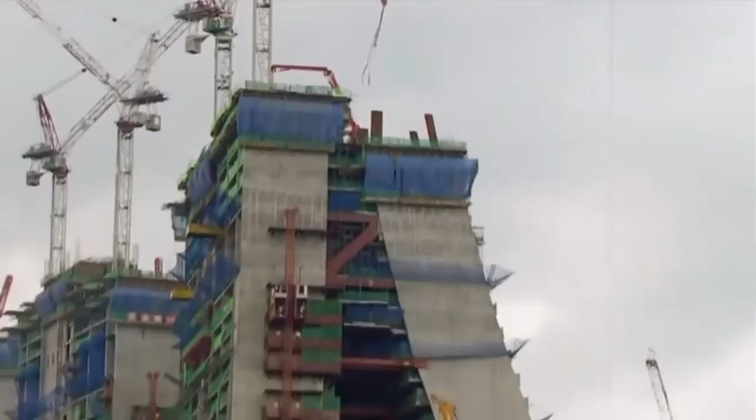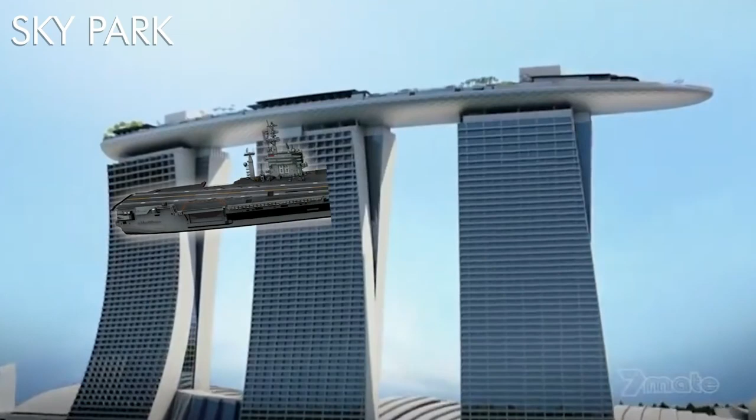During the construction of Marina Bay Sands in Singapore, engineers had to face a challenge they had never imagined. According to the building design, a sky park was going to be built on top of 3 towers, whose size was supposed to be larger than the US Navy's Nimitz aircraft carrier.

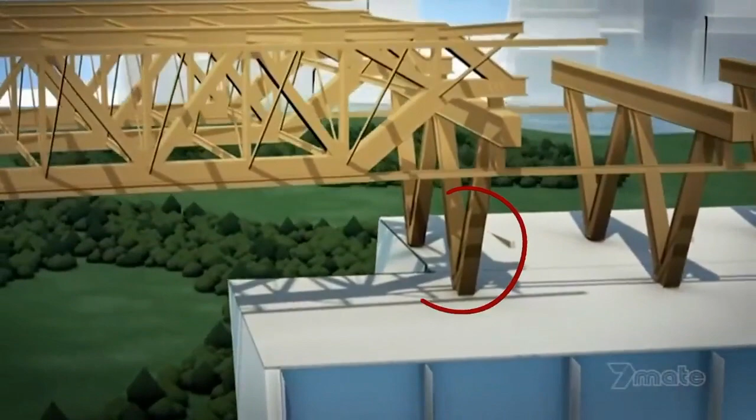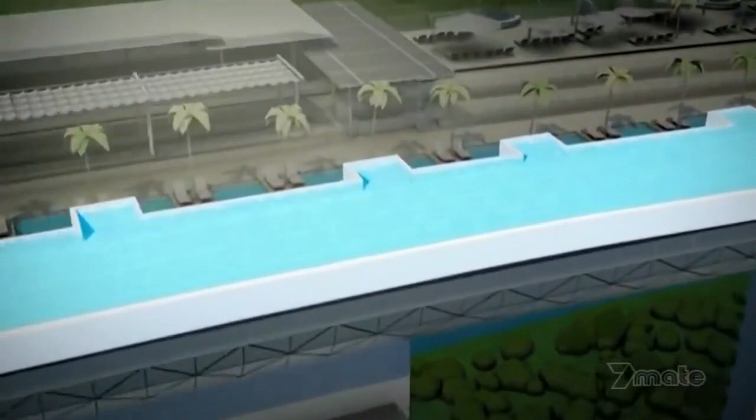And when it was time for the construction of the sky park, engineers found a major fault in the building design. The fault was that the 3 buildings might swing up to 200 millimeters during a tornado, and if the sky park was built despite this fault, the swimming pool filled with 1.5 million liters of water might crack, and the destruction that it would cause is unimaginable.

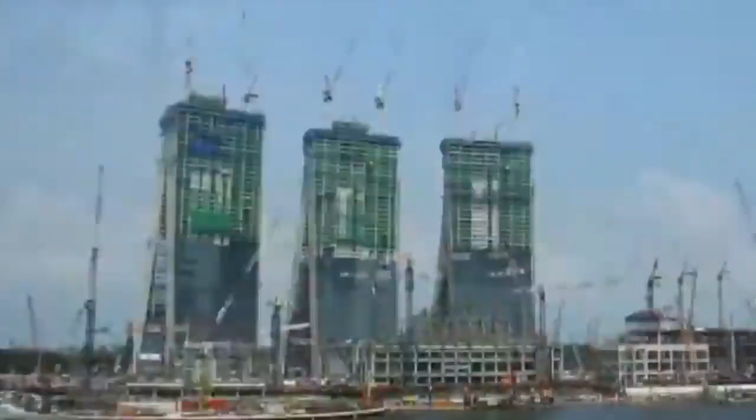Already years of hard work and millions of dollars were spent on this project, and on the other hand, dropping the idea of the sky park would be like compromising the beauty of the entire structure. They needed to find a solution which would keep the sky park safe despite the swinging of the building during strong winds. This was such a serious issue that the entire construction and architecture team was anxious, but a miracle happened.

Singapore is a country which has only one city, and that is Singapore. The entire country is so small that it is slightly larger than the Indian city of Mumbai.

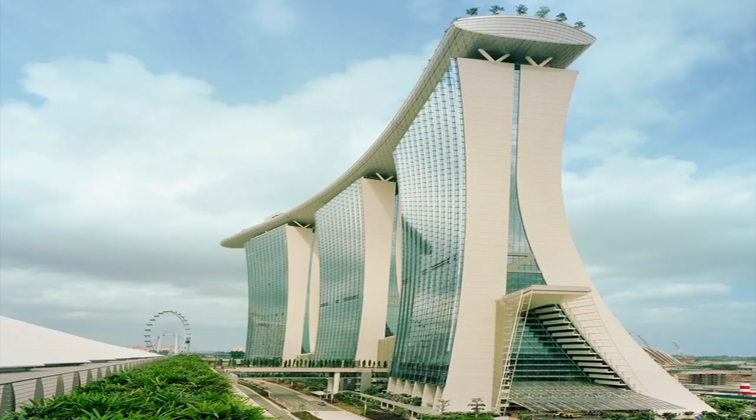Singapore's Marina Bay Sands is one of the most complicated construction projects in the entire world, and that's why it is called an engineering masterpiece. Engineers had to construct not 1 but 3 buildings, whose one portion was going to be bent, and that too taking support from the other portion.

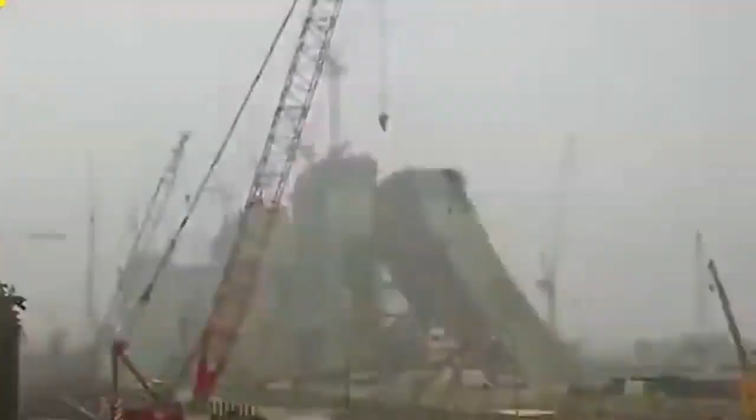The project, costing $8 billion, had 3 buildings 680 feet high, a sky park bigger than an aircraft carrier, a 200 feet high arts museum, and a floating entertainment pavilion that were going to be constructed, above the water. With the cost at which Marina Bay Sands was built, 5 Burj Khalifa-like buildings could have been made. The labor and hard work needed to make this masterpiece was an astounding 16,500 workers who worked together.

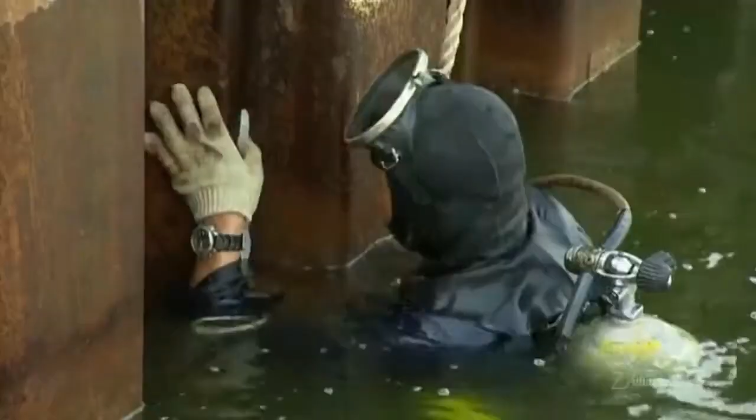Construction workers and engineers faced many challenges, from laying the foundation on soft wet soil near the seashore, to constructing a curved-shaped structure and a unique sky park over it. This was not only the first challenge of their life, but no construction project in the past had faced this kind of challenge. Let's come and see the challenges and their solutions.

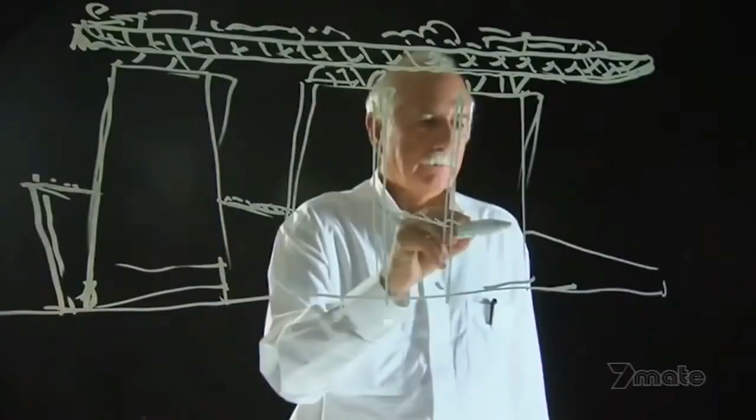Challenge number 1. It was American business tycoon and owner of Las Vegas Sands Corporation, Sheldon Adelson, who was behind the project, who has often been featured in Forbes' richest list. Adelson wanted to build a project that would become the identity of Singapore, and obviously for such a project, its design had to be very unique.

For this purpose, there was no better option than an architect like Moshe Safdie, whose curved designs are mind-boggling, but difficult to construct. After months of hard work, Safdie presented his design, but this design presented a big challenge for the construction team.

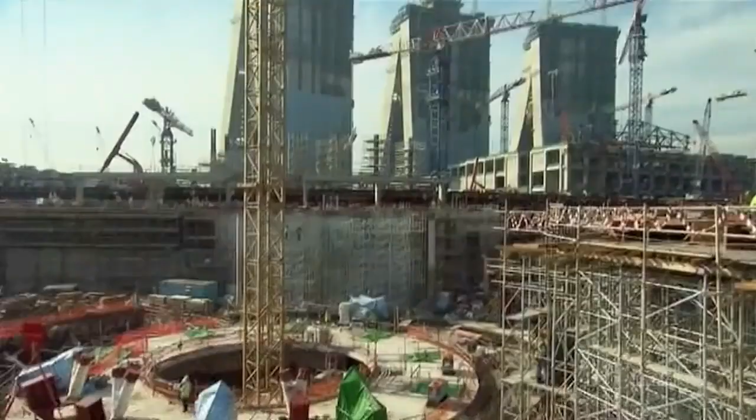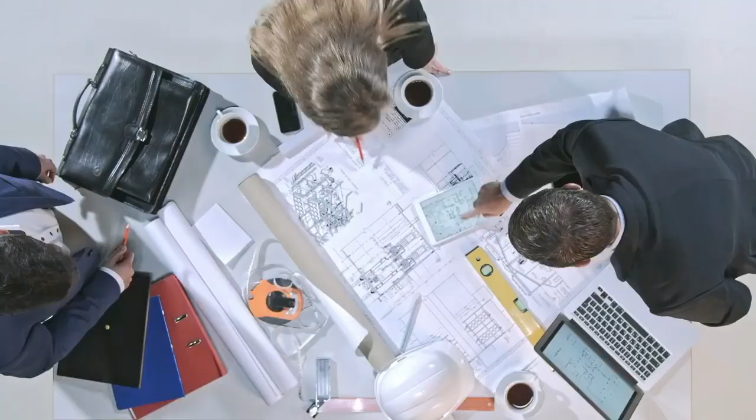According to the construction team, it would take at least 7 years to complete the project, but Sheldon Adelson wanted to complete it within 3 years. In these 3 years, the entire project with the 3 towers, its interior, museum, floating pavilion, and the most complex sky park needed to be built. Accepting the challenge was a big achievement for the construction team in itself.

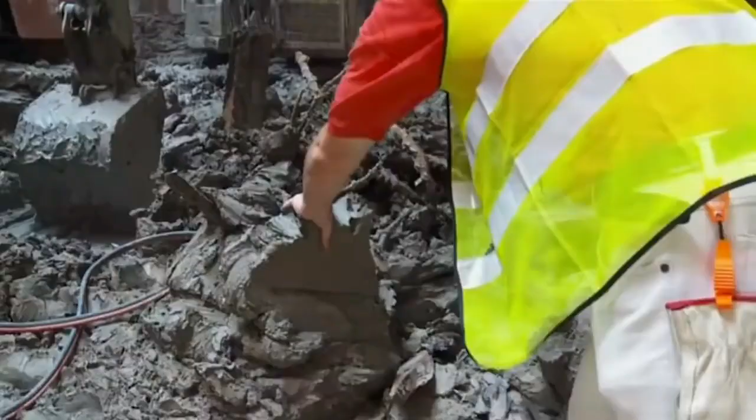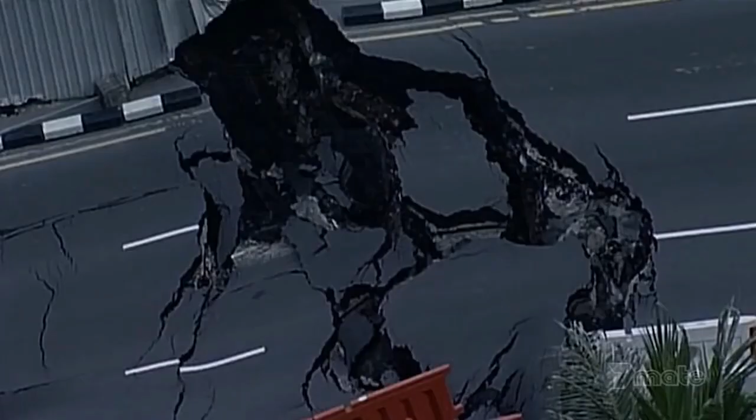Challenge number 2. The site chosen for the construction work was full of soft clay due to the proximity of the sea, which engineers call marine clay. The marine clay is very soft, and it's very hard to walk over it, let alone construct something, and if the marine clay is not treated correctly, it can prove disastrous, which was evident in Singapore's Nicoll Highway case.

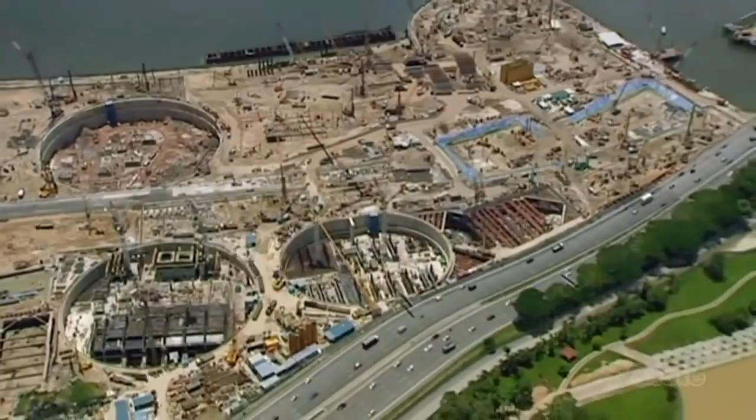A feature of marine clay is that if some of the clay is removed using an excavator, the clay surrounding the ditch fills it quickly. Therefore, it was necessary to find a solid solution so that the clay surrounding the ditch is not able to fill it. To address this issue, engineers decided to build a concrete wall of 1.5 meters thickness, also called a diaphragm wall.

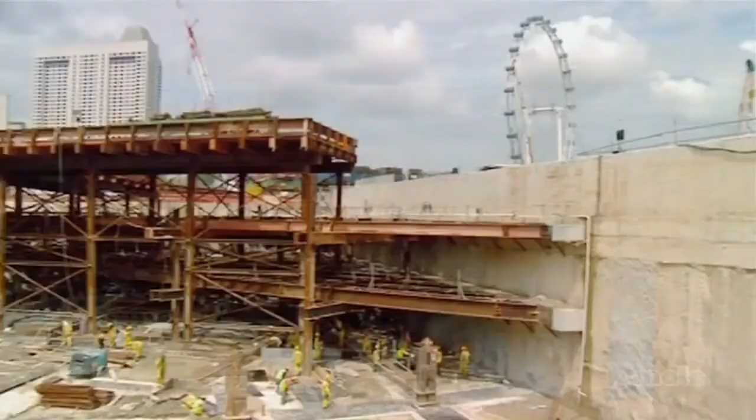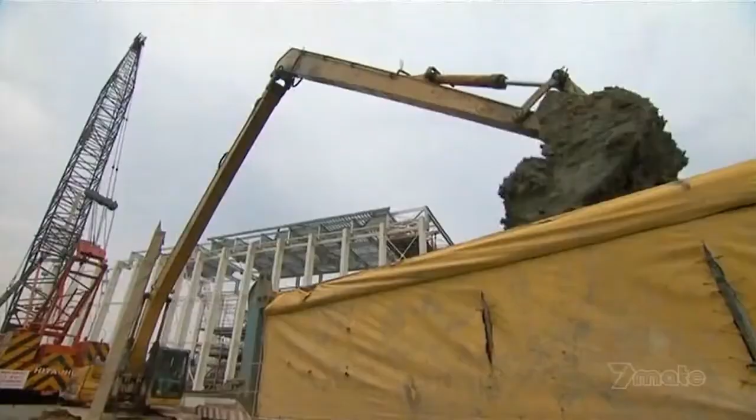A 4,000 meter diaphragm wall was constructed, with a depth of 50 meters below the ground, and with the help of excavators, the marine clay was removed inside them. It took engineers 1 year to remove the marine clay. Now they were left with 2 years to complete the project.

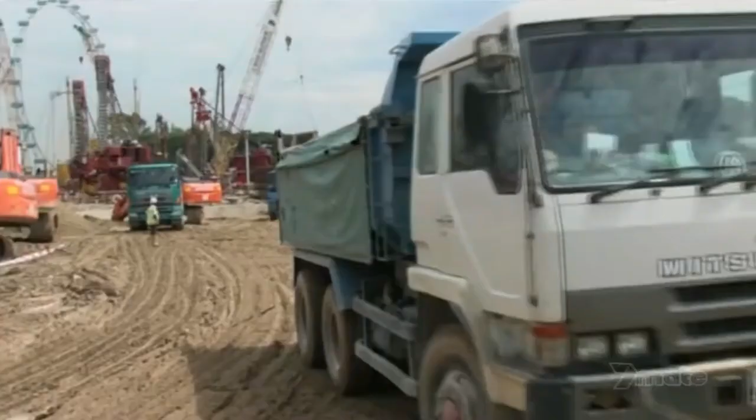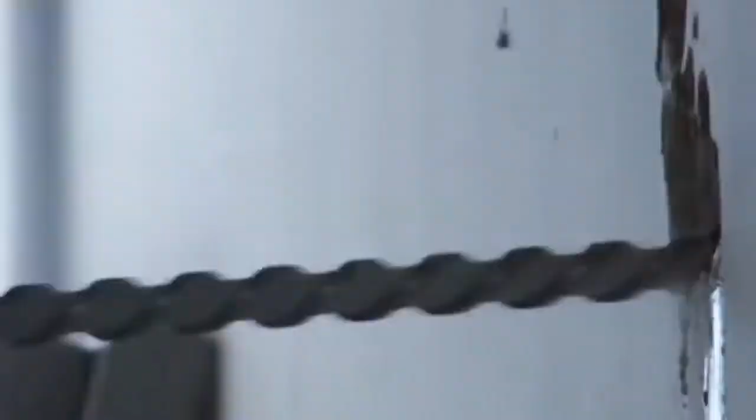Challenge number 3. After getting rid of the marine clay, engineers were left with only 2 years to complete the entire Marina Bay Sands, and this was really a very difficult task. The engineering team didn't budge down, and decided to construct every part of the project simultaneously. But for that, a large number of workers was required. A mind-boggling 16,500 workers were hired to work day and night, in shifts.

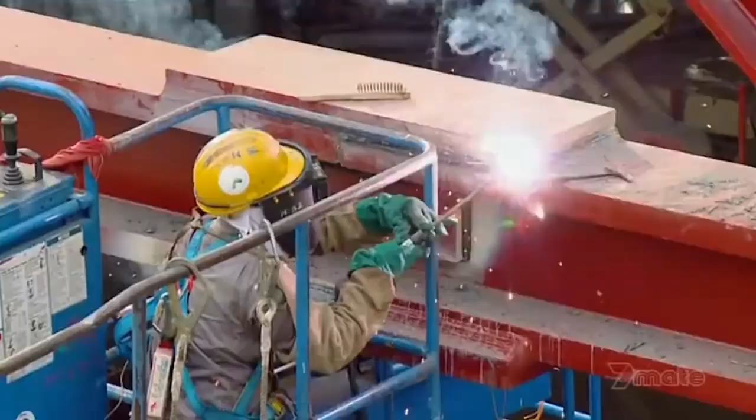It was a daunting task to manage this army of workers and provide them food. For this purpose, the world's biggest canteen was made. In this canteen, just for preparing one-time meal, $82,500 was spent. Challenge number 4: the complication for the construction of the 3 towers was that one portion was straight, and the other one was curved at a certain angle, and both parts would stand in support of each other.

On paper, it looks easy, but practically building this was a challenge that nobody had ever attempted before.

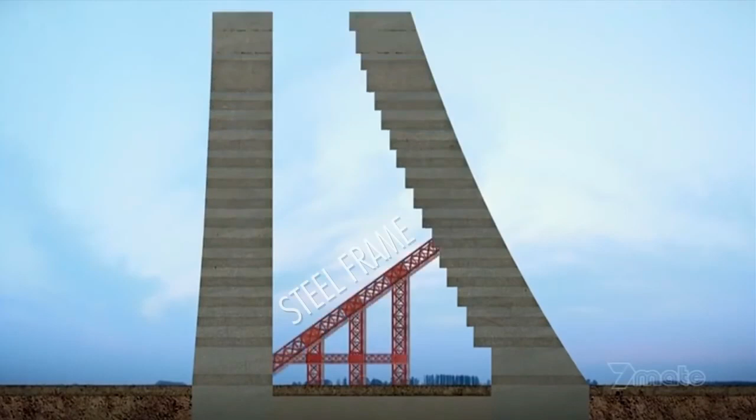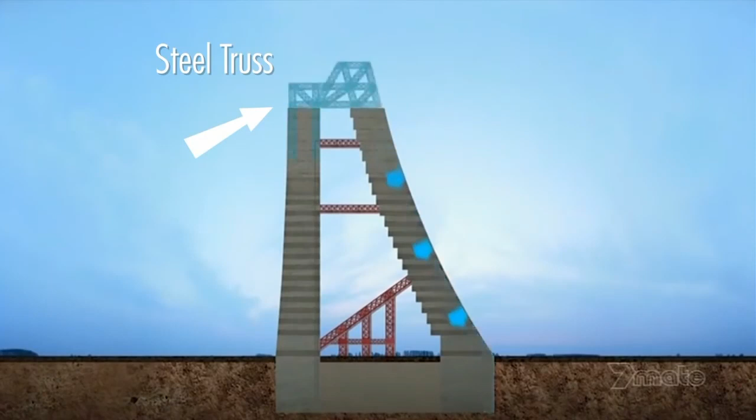To implement this design practically, engineers found a very effective way. With the help of concrete blocks, a floor was erected every 4 days, steel wires were inserted inside the curved building for support, and as the height increased, both buildings were given temporary support of steel frames. At the 23rd floor, where the curved portion met the straight building, a heavy steel truss joined both portions, and the steel frames were removed.

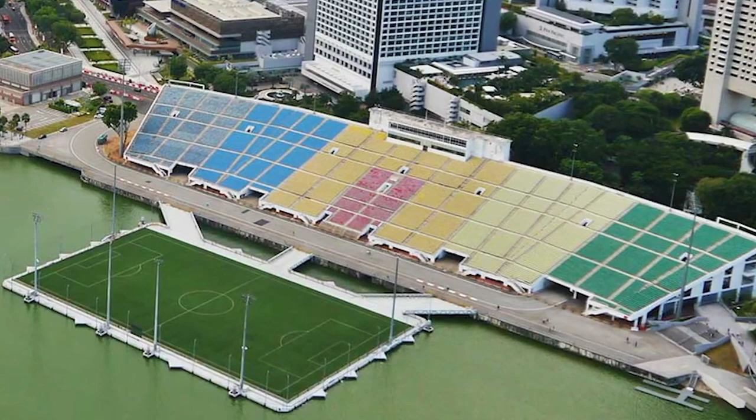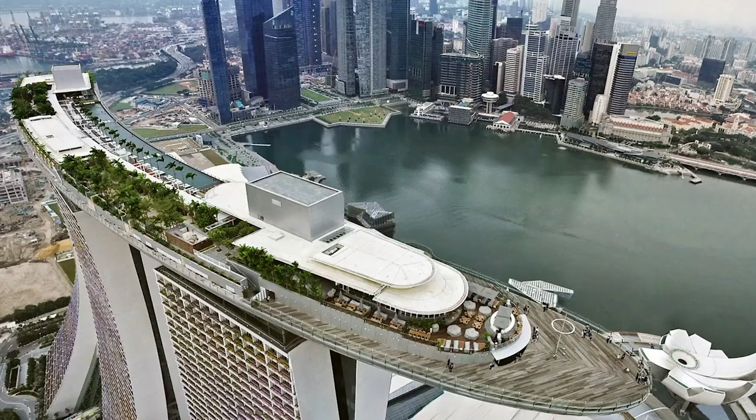Challenge number 5. 1.5 years have passed. The construction of 3 buildings of the Marina Bay Sands, Arts Museum, and Floating Crystal Pavilion was completed, and finishing work was going on. But one portion was still left to be constructed: the 1,115 feet long Sky Park, needed on top of the 3 towers, and the engineering team had 6 months to complete this task.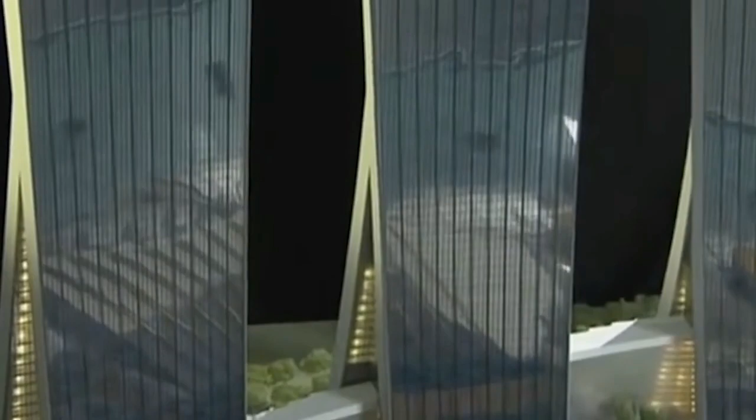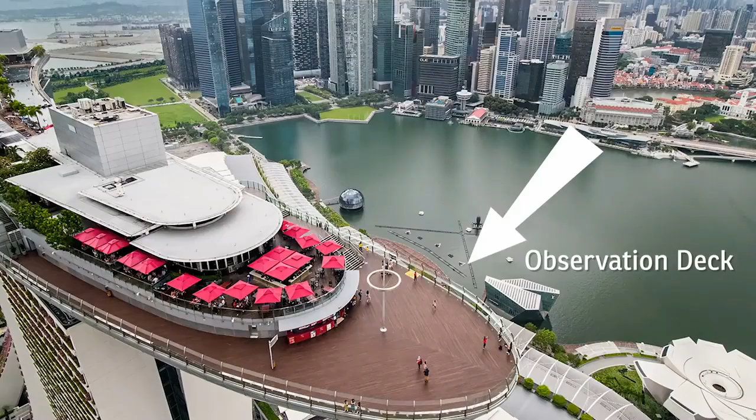Almost all luxury hotels and resorts in the world have open space with gardens and pools, but since Marina Bay Sands was being constructed in a very congested area, it doesn't contain any open space. Therefore, it was decided to have a large sky park at the top of the buildings, hosting a 150 meters long infinity pool, gardens, open-air restaurants, a yoga center, and an observation deck to witness a 360 degree view of Singapore.

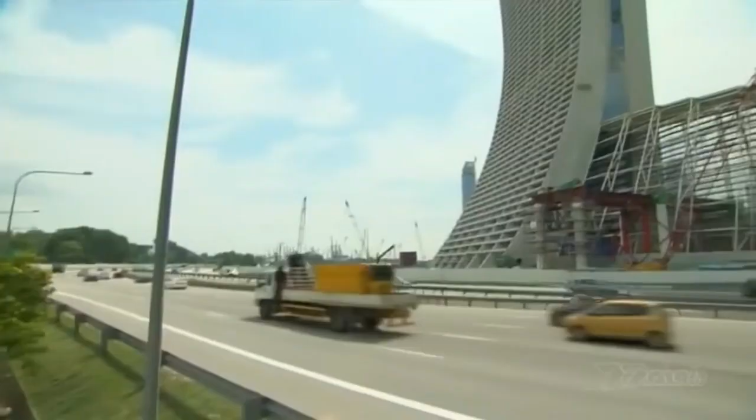But when the sky park was about to be constructed, engineers detected a major fault, delaying construction. Since all 3 towers were built independent of each other with no connection between them, engineers believed that during strong winds, the buildings might swing in different directions, and if the sky park were constructed despite this, it could be disastrous.

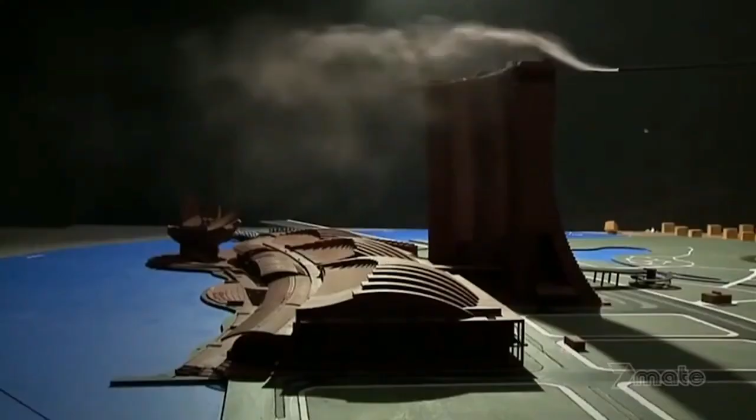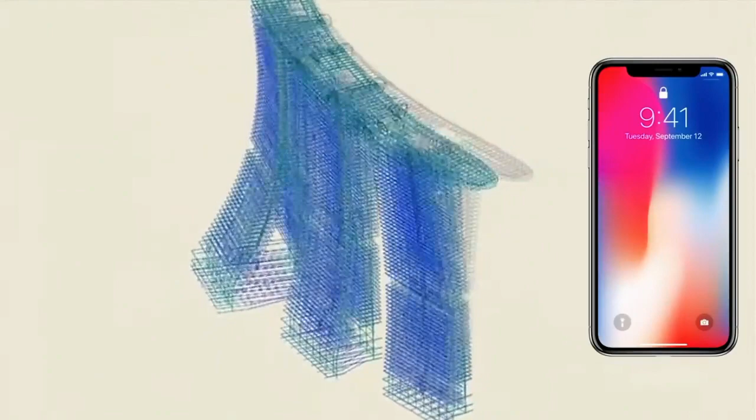To assess this risk, a wind tunnel test of the project model was required. With help from wind engineering company CPP, pressure sensors were attached to the weak points of the model, and it was tested against an artificial typhoon. Unfortunately, the result was positive: wind engineers revealed that during a tornado, the top of the 3 buildings might swing up to 200 millimeters, almost like the length of a mobile phone, or a little more.

Although it doesn't seem a big swing, the nature of concrete is that it is not flexible, and a little pressure can crack it. If the sky park is built disregarding this risk, then during storms cracks might appear in the 150 meters long infinity pool, and eventually a portion of the sky park might collapse.

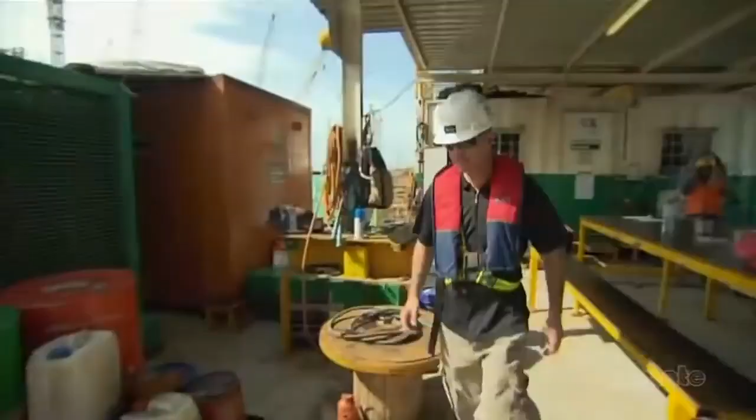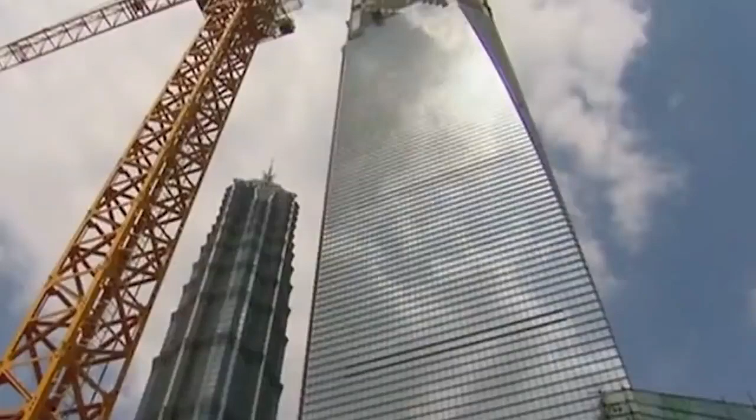The news was depressing for the entire construction and architecture team. On one hand, there was 1.5 years of hard work by 16,500 workers, and on the other hand, millions and millions of dollars were spent. For the past 1.5 years, workers, staff and engineers had become emotionally attached to the 3 towers, so breaking and rebuilding the entire structure was not an option.

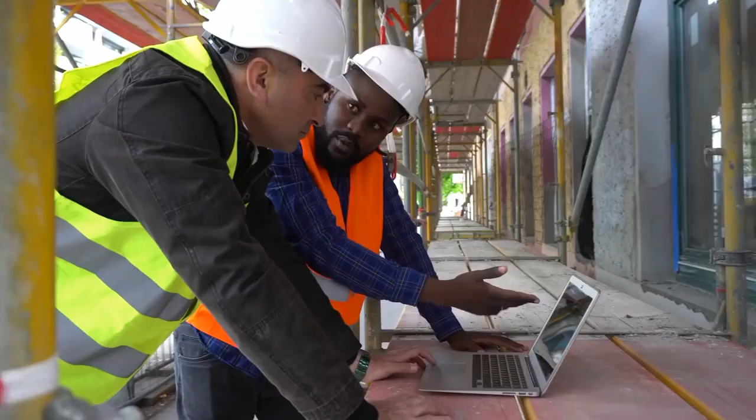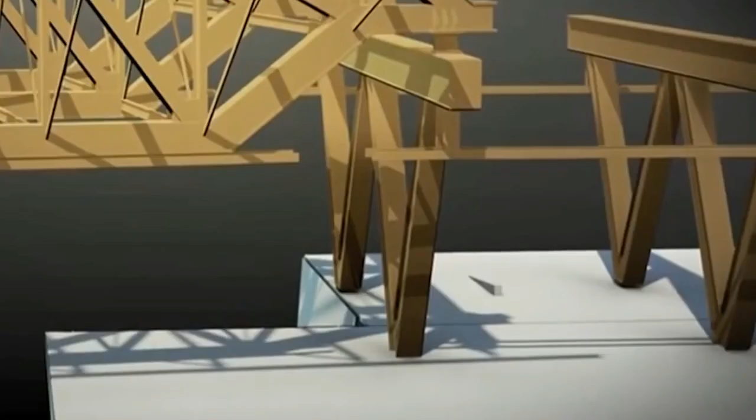Engineers had to find a solution to keep the sky park safe despite the swinging. After months of brainstorming, a solution was found. Utilizing bridge engineering technology, it was decided to introduce movement joints, where the entire sky park would be built upon a steel bridge laid over the 3 buildings. Special movement joints in this steel bridge could absorb up to 250 millimeters of movement.

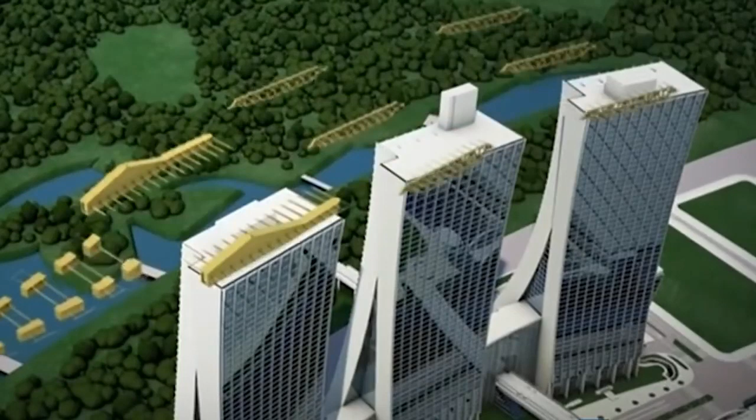Everyone understood the solution, but for that it was necessary to build the sky park in 3 different parts. It was no longer possible to build a single 150 meter long infinity pool, so engineers decided to divide it into 3 sections of 50 meters each, with some space given in between for movement.

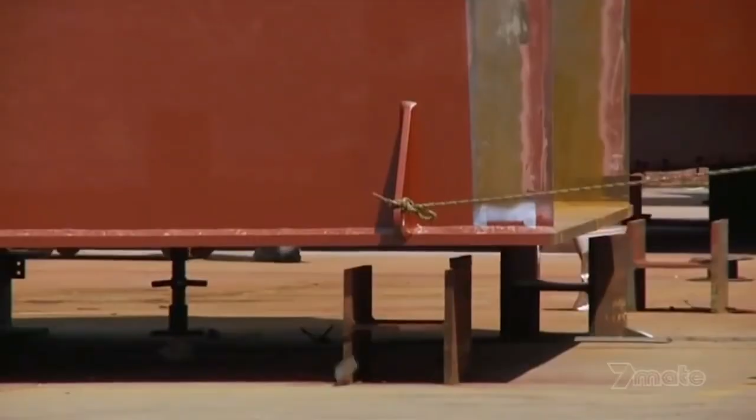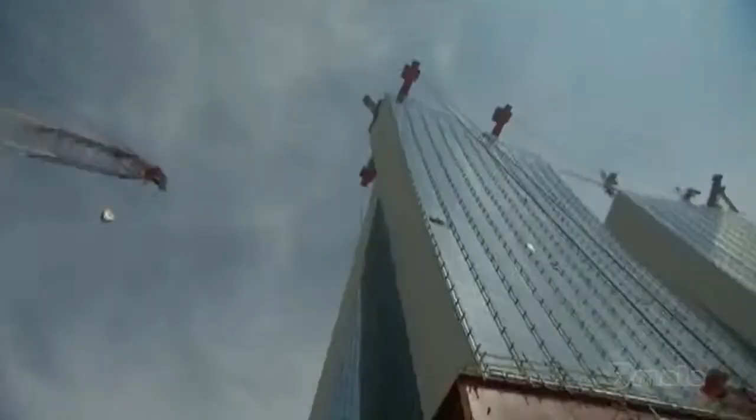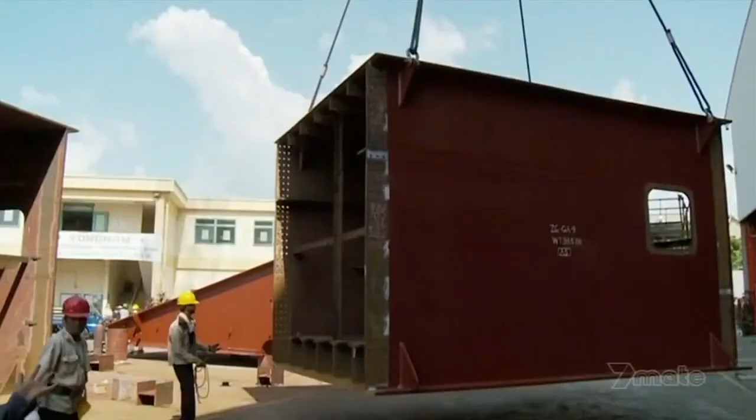Challenge number 6. In total, 1,400 tons of steel was needed for the construction of the Sky Park, a weight similar to two Antonov An-225 Mriya, the world's biggest cargo plane. It was impossible to transport this much weight to the top, so it was decided to divide the construction into 14 segments and assemble them on top. To carry these 14 big steel structures up, the world's biggest lift was installed with the help of Swiss-French company VSL, which would carry one segment to the top in 16 hours.

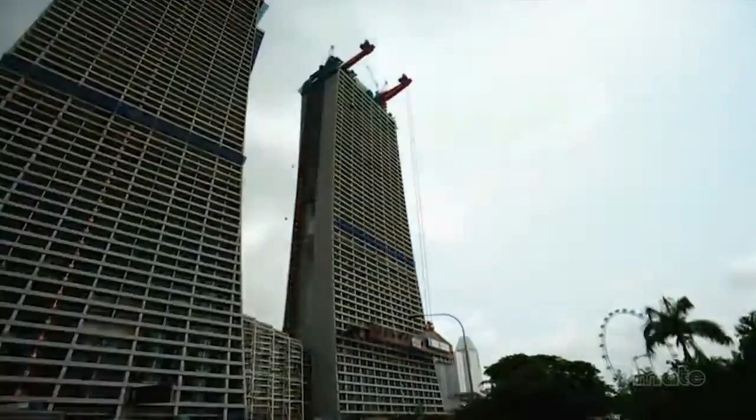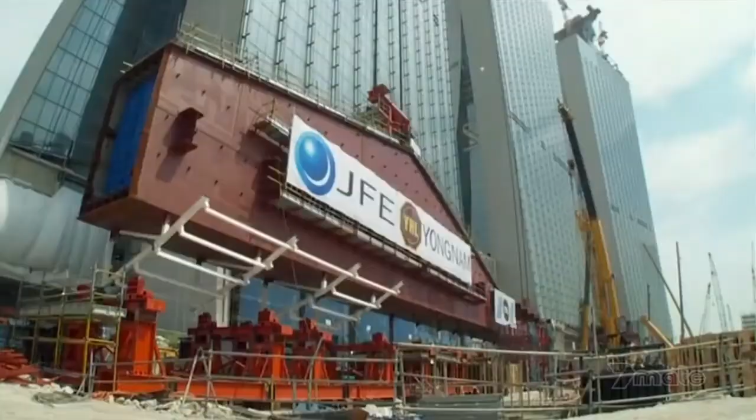As soon as the lifting process started, the danger of sea storms began lurking. This hanging 100-ton steel structure could damage the building by swinging in the storm, or even fall. The lifting process started in the morning, was suspended for many hours due to the storm, and finally by midnight it successfully reached the top. Similarly, one by one, the entire steel structures were lifted, and the Sky Park was completed by assembling them.

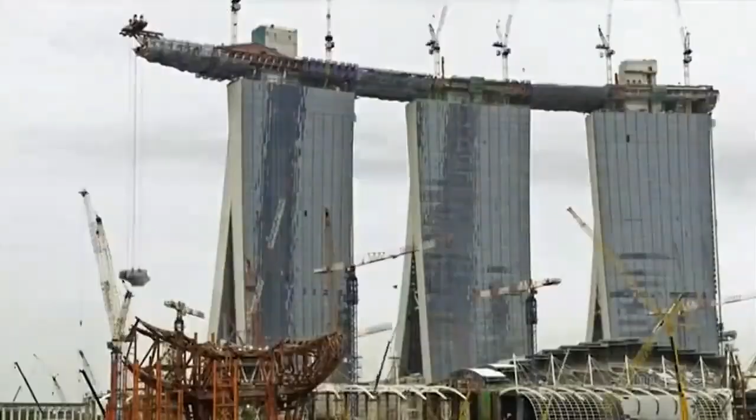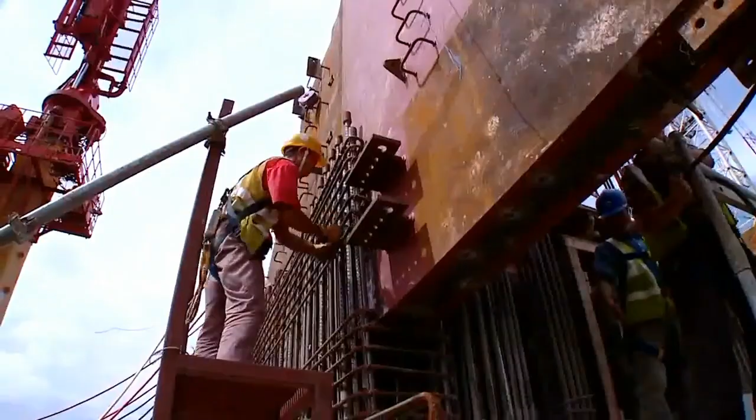Instead of 2009, construction of Marina Bay Sands was completed in 2010, with a delay of 1 year owing to the Sky Park. Today Marina Bay Sands hosts millions of visitors daily, but the hard work of 16,500 workers to build this masterpiece will always be remembered.